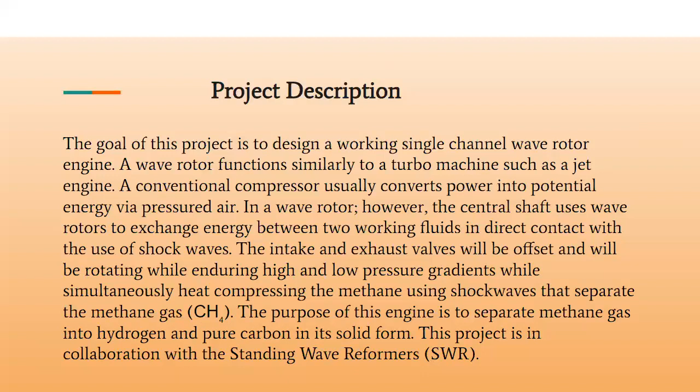So the goal of this new project is to design a working single channel wave rotor engine. A wave rotor functions similarly to a turbo machine, such as a jet engine. A conventional compressor usually converts power into potential energy via pressured air. In a wave rotor, however, the central shaft uses wave rotors to exchange energy between 2 working fluids in direct contact with the use of shock waves. The intake and exhaust valves will be offset and will be rotating while enduring high and low pressure gradients, while simultaneously heat compressing the methane using shock waves that separate the methane gas. The purpose of this engine is to separate methane gas into hydrogen and pure carbon in a solid form. This project is in collaboration with the Standing Wave Reformers.

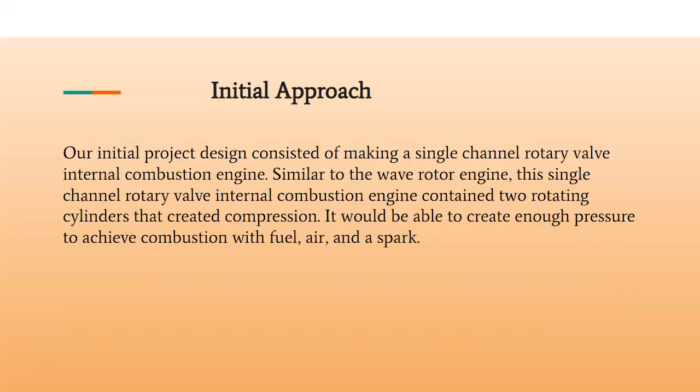Okay, so as mentioned earlier, the initial project design consisted of making a single channel rotary valve internal combustion engine. Similar to the wave rotor engine that we're building right now, the single channel IC engine contained 2 rotating cylinders that created compression. It would also be able to create enough pressure to achieve combustion with fuel, air, and a spark.

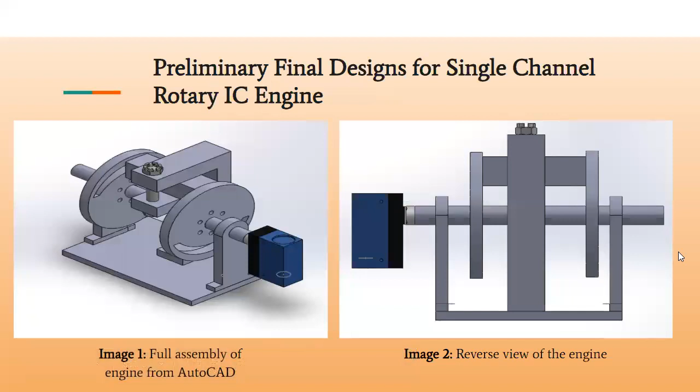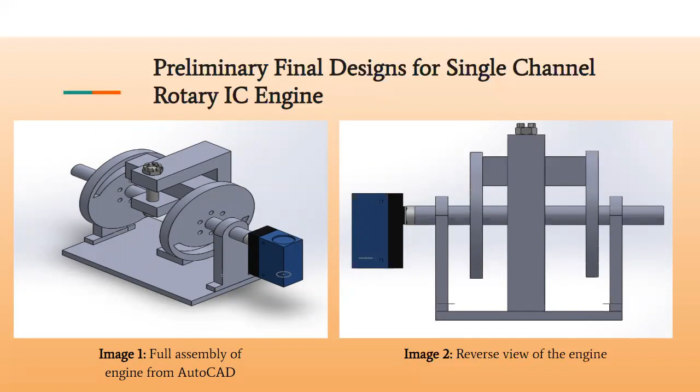Right here you can see a full assembly of the final design of the IC engine. As you can see, we have 2 rotating valves. Everything else would be stationary. The 2 rotating valves would be rotating offset, and we can see on the left side of the valve, air would come in through that intake valve, and fuel will be injected, mixed, and ignited by a spark plug. In the back, you can see a combustion chamber, and on the right side, the exhaust gases would be purged through the exhaust valve.

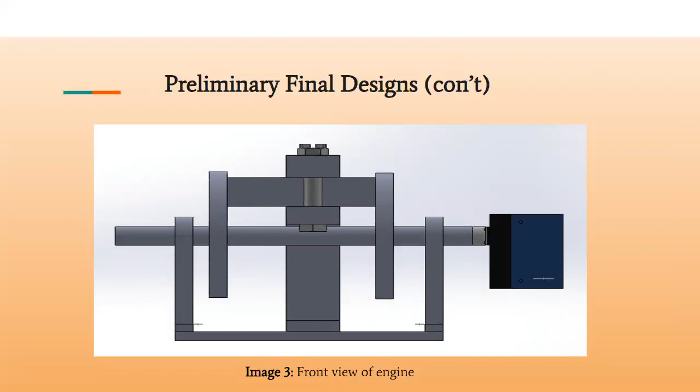And yeah, these are basically just some different views of that final engine. There were some ISO side views, front views. Here are also some preliminary final designs of the intake and exhaust valves, and just some simple bearing holder drawings.

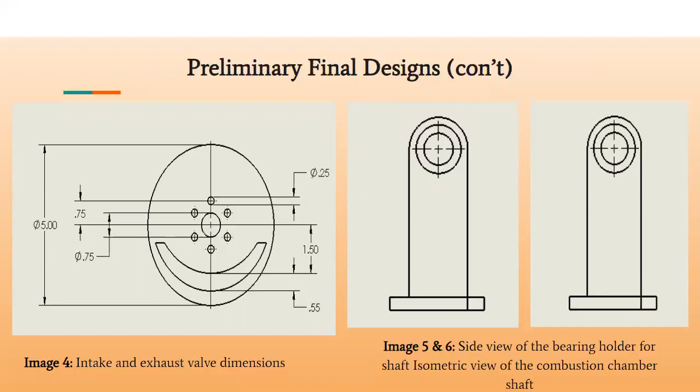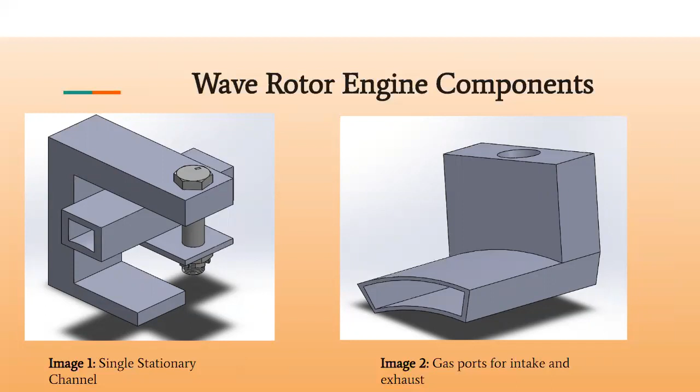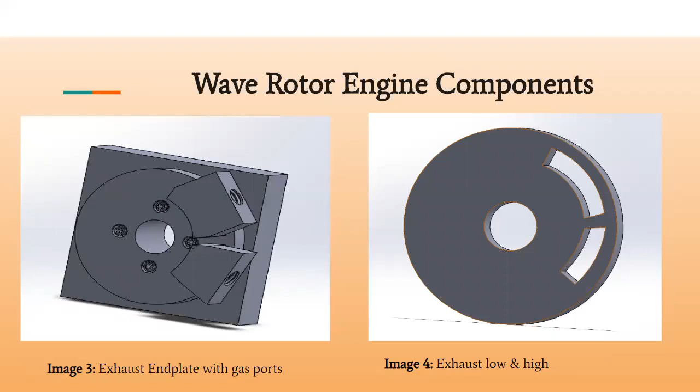For this engine, the high pressure and low pressure gases are fed through the gas ports in the intake end plate and expelled through the exhaust end plate and ports. Once the gases are fed into the low pressure and the high pressure ports, methane is then introduced into this single channel, and it is compression heated using shock waves.

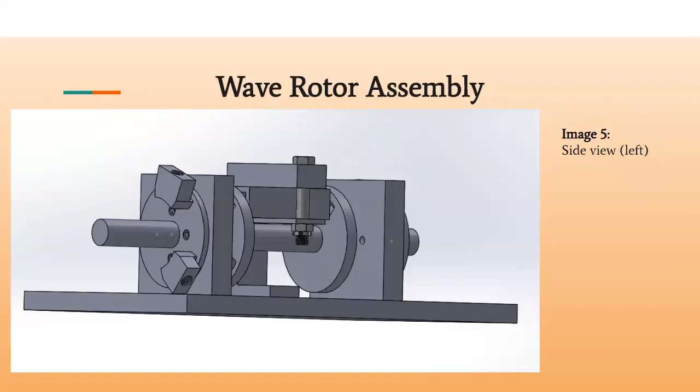Now, the reason that these valves are set at different degrees of opening is so that at some point in the rotation of the engine from the motor, there's going to be a point where both sides are open, and then a point where both sides end up closed, and this is where compression heating induces a shock wave to crack methane. And then at some point, the exhaust is going to open up and expel, and then the whole process is repeated. And like I said before, methane is going to be broken into pure carbon in its solid form and hydrogen.

This is another view, from the side. So if you're looking at this from left to right, the left side is the intake side with the intake port, which leads into the single stationary channel. And then, like I said, once both sides close, the process begins and occurs, and then it is expelled into the right side, which is the exhaust valve, and that leads into the exhaust ports, and the process is then repeated.